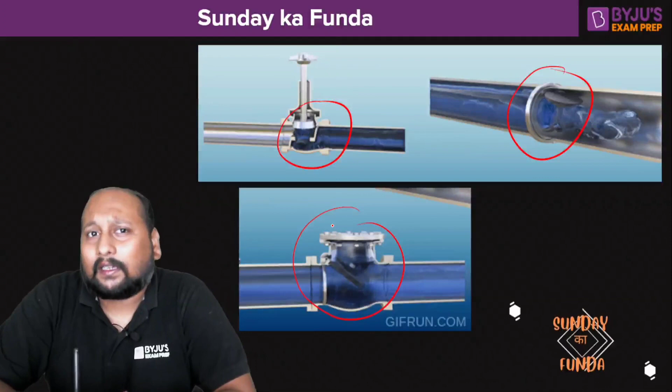But whenever we have this kind of design arrangement with a movable part, the durability of that design will be slightly less, because it is always associated with the movable part. If there is some defect or failure in that part, the entire concept of unidirectional flow will be altered. So whatever that unidirectional valve was designed for, it won't be fulfilled, meaning the fluid will be able to move very easily in both directions.

So if you eliminate that movable part, and design it such that the fluid moves in one direction only even without a movable part, that would be the best design in the field of engineering. Nikola Tesla actually gave this design, and it was so mind-blowing that you'll understand it uses basic concepts of fluid mechanics to design this Tesla valve.

To understand how the design actually works, we'll take some basic examples for more clarity. Let us suppose there is a wall, and on the periphery we have an uneven shape like this, identical from both sides. So when fluid tries to enter from left to right or right to left, in both scenarios the fluid faces the same resistance.

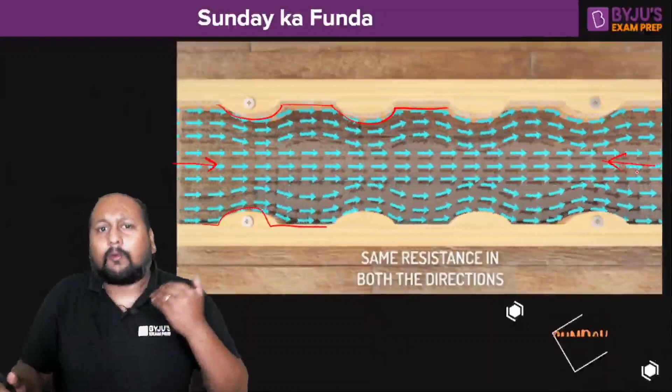So it is not a unidirectional flow, because even if the fluid changes direction, it still moves the same way with the same resistance offered. So let us try to improve or alter the design so that the fluid will be able to move only in one direction.

Let us suppose in this scenario I've taken a design like this. When fluid tries to enter from the left hand side versus the right hand side, in both scenarios the fluid will have a different flow rate. The reason is, on one side we have a diverging nature, and if it enters from the right hand side, it is a converging nature.

We always know that when fluid is trying to converge, its velocity is going to increase, and the pressure is going to decrease. So it's quite suitable for a smooth flow.

But on the other hand, if you have a diverging flow, the velocity drops down and the pressure increases. So as the fluid moves ahead, there are chances of adverse pressure effects, due to which the fluid will move in the opposite direction. There is a high chance that in a diverging flow, after a certain distance, the fluid will come back - we will have a back flow, because the pressure increment is very high.

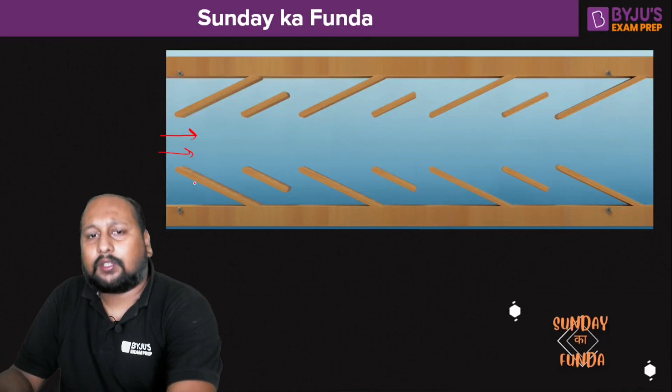If you try to visualize, when this particular fluid is trying to enter from the right end, it will be easily able to move because there is very less restriction, since it's converging in nature. But on the other hand, if you talk about a diverging nature, when it tries to move, the fluid pressure is going to rise.

Due to this adverse increasing pressure, there will be a point where the fluid tries to move in a backward direction, and the fluid particles will try to hinder the flow. So what happens? The resistance of the flow will be increasing.

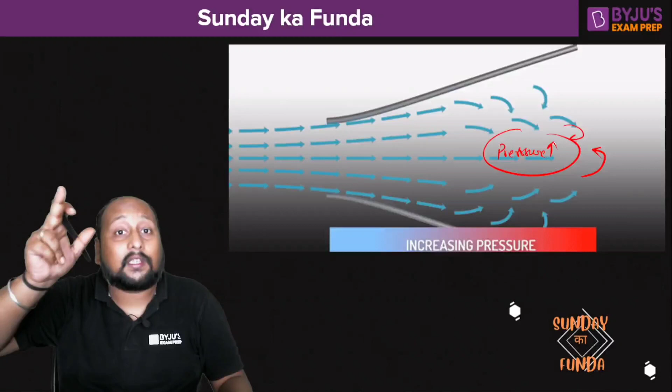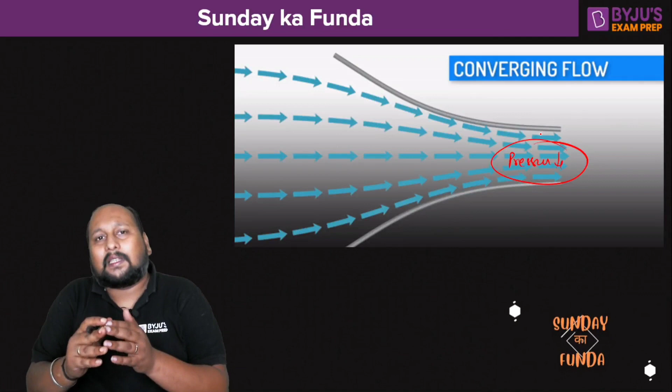But on the other hand, if you're having converging nature, it's very easy, your pressure is going to decrease, and ultimately it's basically making a very smooth flow, and the fluid will be able to move in a unidirectional way, won't be having a backflow at any point of time.

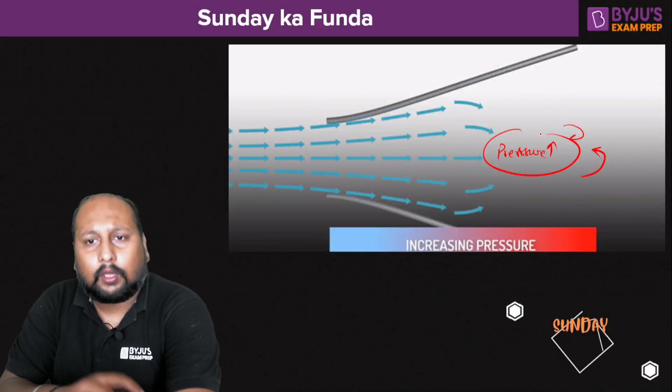But in case of diverging flow, after a certain distance, there's a high possibility of creating a vortex. There are high chances of creating a vortex flow.

It's like if you take two water pipes and place them just opposite to each other, there will be a huge pressure drop. They will be colliding and the energy is going to decrease, and ultimately there will be huge losses you will be able to visualize.

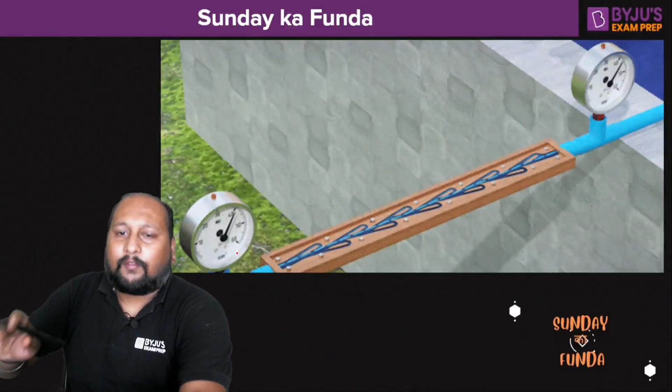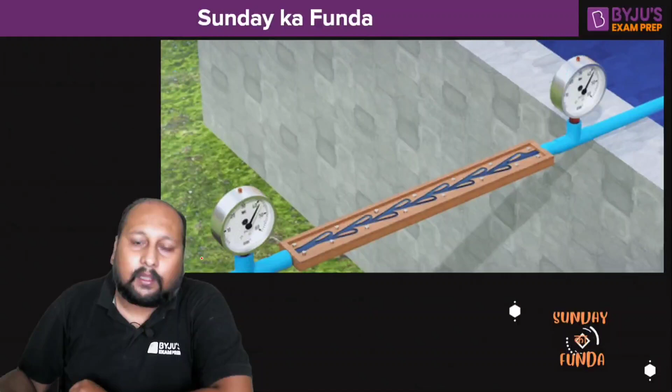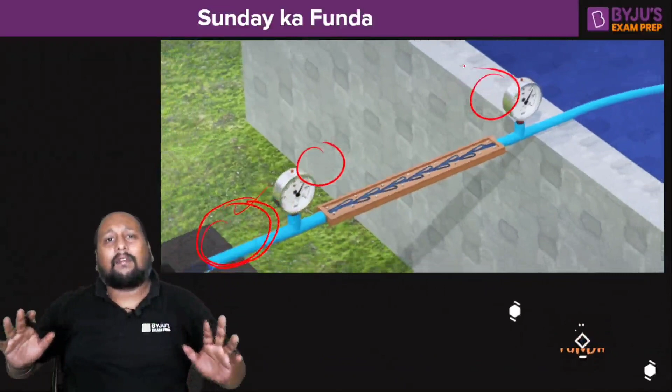So if I try to attach this Nikola valve, in the first case I'm going for a unidirectional flow, and the flow rate is very high. But when you try to turn it around, the flow rate becomes drastically decreased and the pressure drop is very high, and without having this movable part we are able to design this concept of a unidirectional valve.

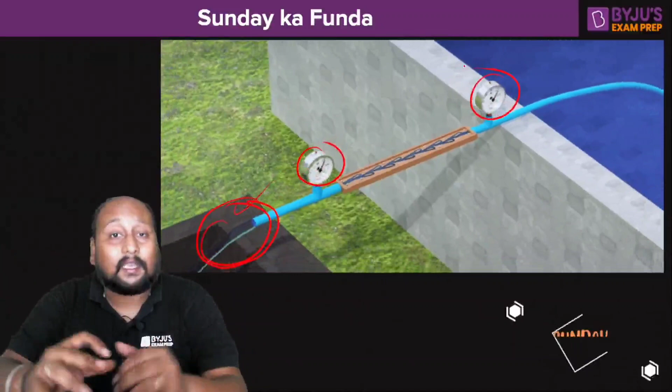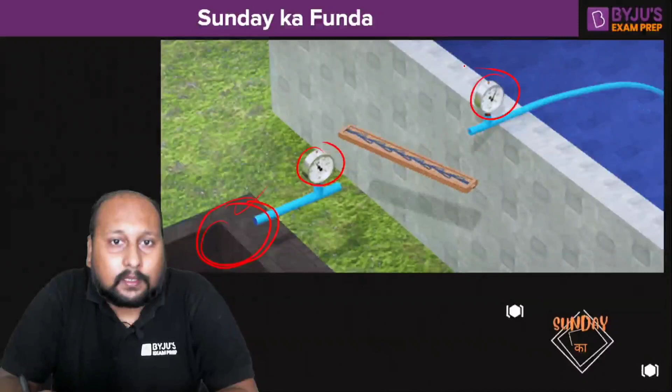And this concept or design is being implemented in pulse jet engines also. In pulse jet engines, we are basically implementing this valve in order to have better efficiency. So this is all about the concept of Nikola Tesla's valve.